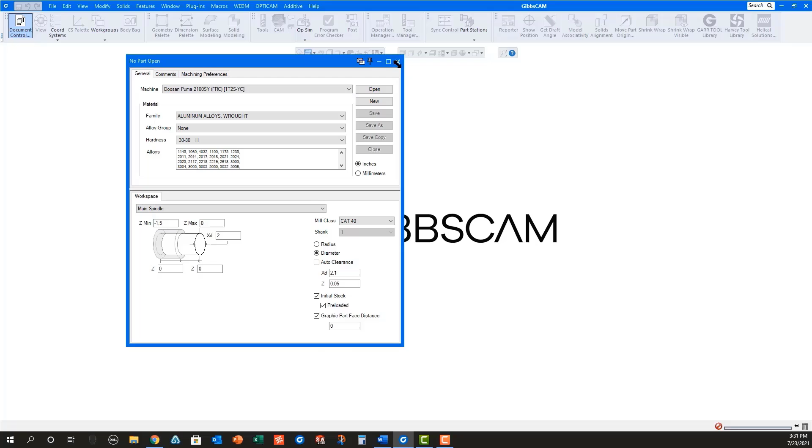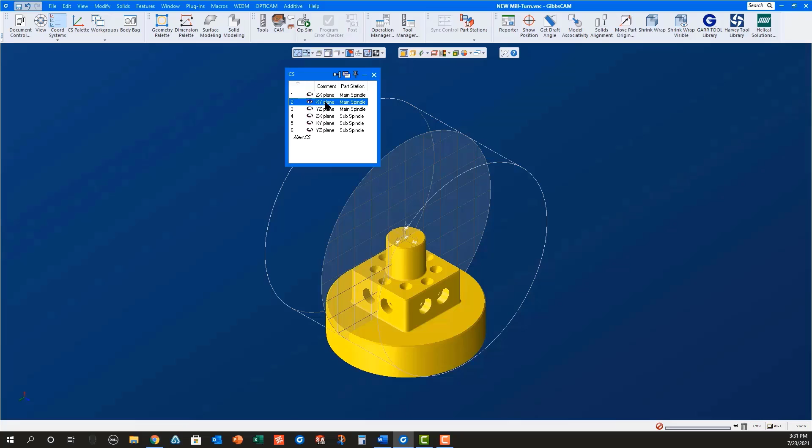In this case, I'm selecting a Doosan twin spindle as my machine before opening a SOLIDWORKS part file named New Millturn. Once the part is open, you will need to position the part properly in the main spindle. I find the easiest way to do this is to open the Coordinate Systems dialog and select XY plane for the main spindle. With Face Select turned on, select the front face of the part before right mouse clicking to align face to CS.

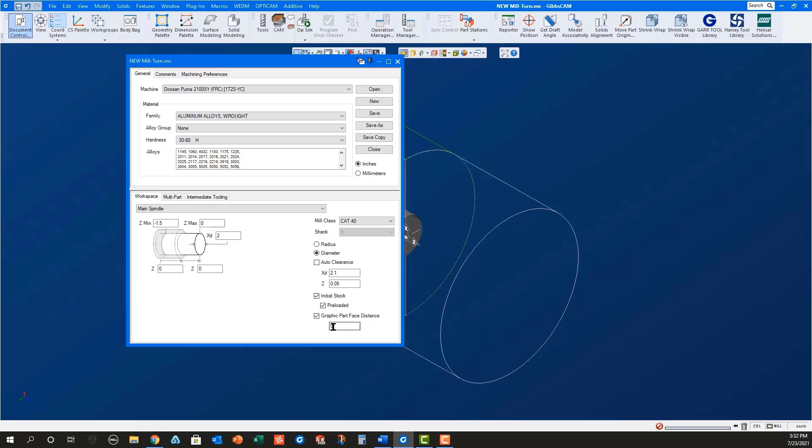Now use Modify Shrink Wrap to set the starting stock dimensions. Open the Document Control dialog and set the desired XD and Z clearance values, and then set the graphic part face distance to 0. Double-click the solid model to place it in the body bag and rename it Part in Main.

Select the part in the body bag and use Ctrl-D to duplicate it. The new solid in the workspace is now selected. Use Modify Translate to move this new solid into position in the sub-spindle. This will always be the length of the part in the Z-axis as a positive value.

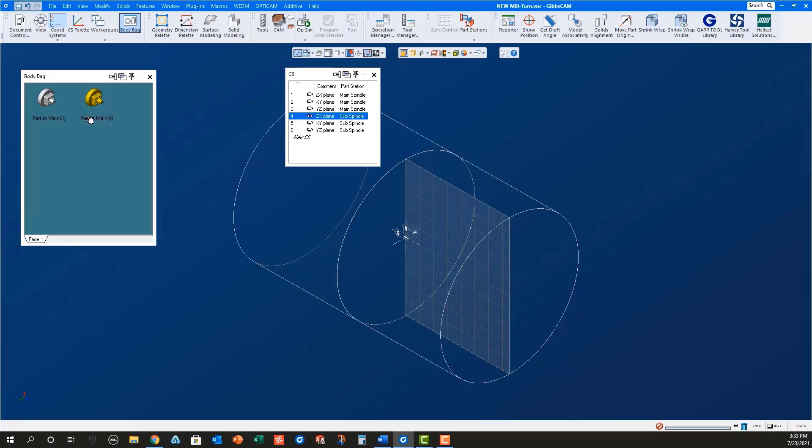Once this new part is in position in the sub-spindle, select the ZX plane in the Coordinate Systems dialog, right mouse click it, and change CS XYZ to make the solid belong to the sub-spindle. Double-click the model to put it in the body bag, where you can rename it to Part in Sub. Now double-click both solids to put them back into the workspace.

Open the Workgroup dialog. Rename Workgroup 1 to Blank since we will leave this unused. Click on New Workgroup and rename it to Check, as we will use this geometry to make certain everything is set up correctly for simulation.

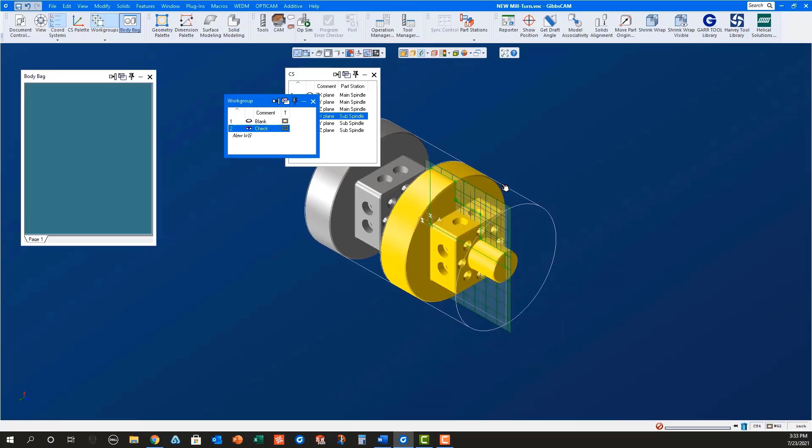With the ZX plane for the sub-spindle still active, turn on the profiler and Slice Spun Body. Select the green profile and then right mouse click on it to extract geometry. Now switch to the ZX plane for the main spindle. Select that green profile and right mouse click on it to extract geometry. Turn off the profiler.

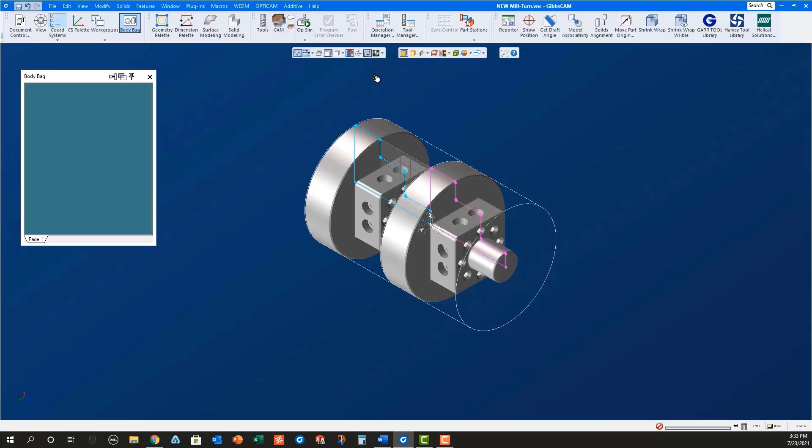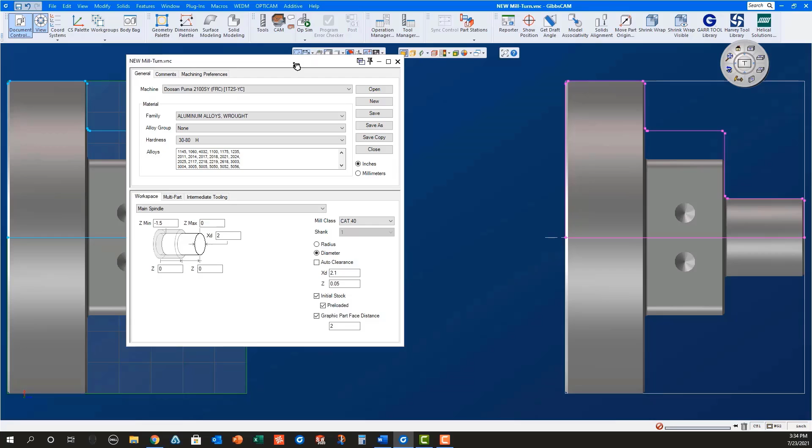Notice the geometry for the main is blue while the geometry for the sub is magenta. This is how GibbsCAM shows geometry in the active CS versus an inactive CS. Open the Document Control dialog and set the graphic part face distance to 2. Notice how the solid model and the geometry for the part in sub move with the stock for the sub-spindle.

While in the Document Control dialog, for the main spindle, set the Z max to 0.025. This will be the stock to remove with facing. Set the Z min to Z minus 1.65, which is the length of the part plus cutoff tool width plus stock amount to face in the sub-spindle.

For the sub-spindle, make sure Initial Stock is unchecked, since the stock is being transferred from the main spindle. Also, for the sub-spindle, set the Z max to 0.025. This will be the stock left by the cutoff tool to remove with facing. Set the Z stickout length to 1.025, holding on to 0.5 of material with the sub-spindle, with the part being 1.5 long plus 0.025 stock for facing with the sub-spindle.

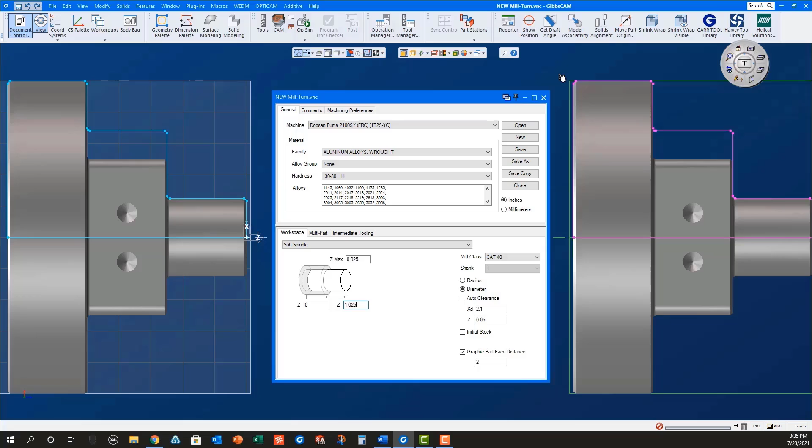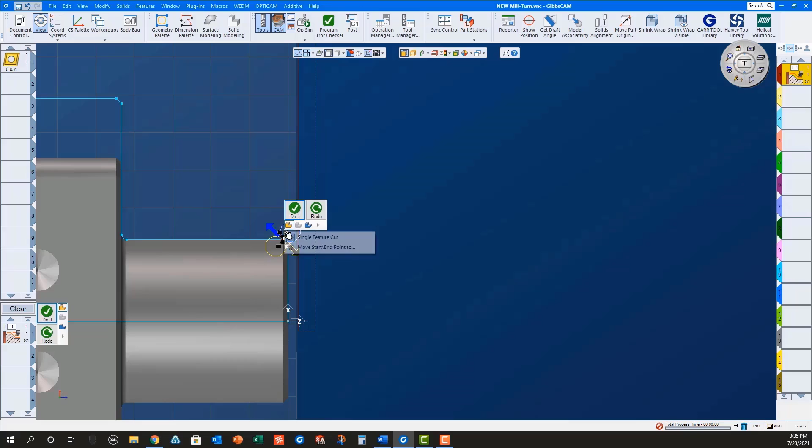Now that everything is set up correctly, we will program the part. First, I will load a facing process for the main spindle. Select the geometry, select the machining markers, and do it. Then I will load a turning process for the main spindle, select the geometry, select the machining markers, and do it.

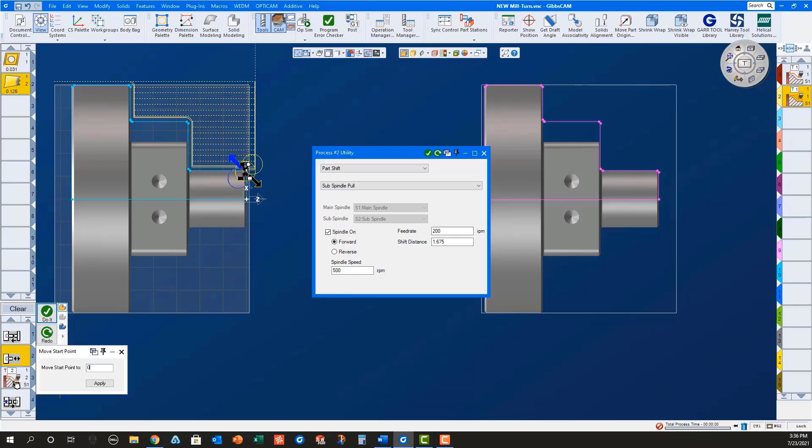Next, I will load all of the processes for picking off the part with the sub-spindle. These consist of a sub-spindle in process to a grip Z of 0.5, a sub-spindle pull with a shift distance of 1.675, which is part length plus cutoff tool width plus 0.025 stock for facing on the sub-spindle plus 0.025 stock for facing the next part, a contour part process with cutoff selected, a sub-spindle return with part in main.

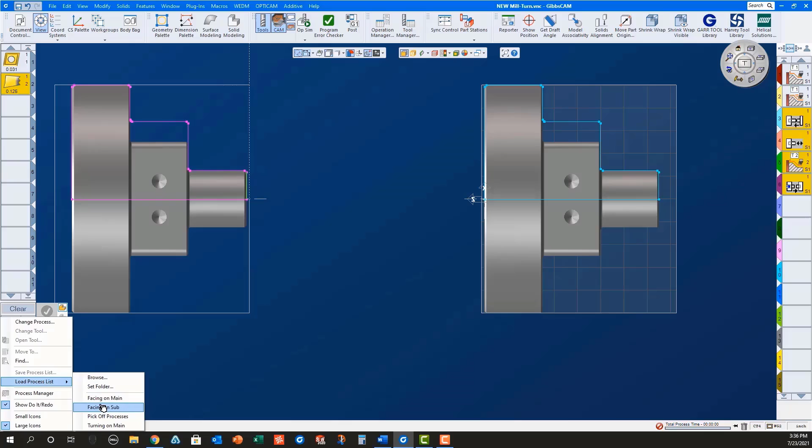I will select the geometry on the front of the part for the cut-off contour operation, and then do it. Finally, I will change the ZX plane for the sub-spindle, load a facing process for the sub-spindle, select the geometry, set the machining markers, and do it.

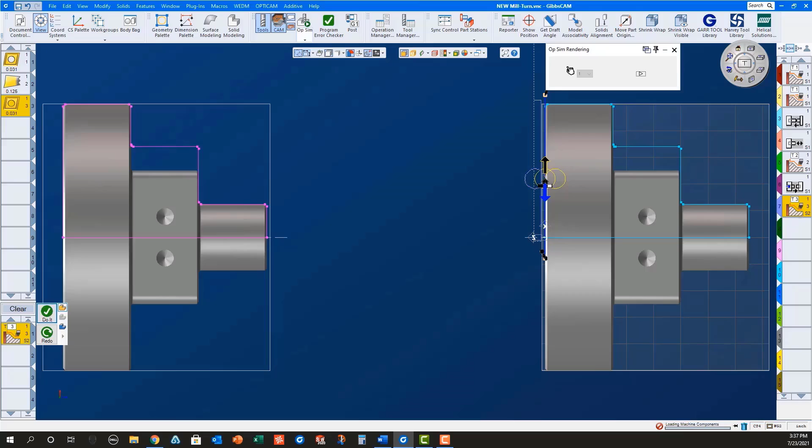Using OpSim rendering with stop at part, load, unload selected, and overlay geometry turned on, I can clearly see that everything is set up correctly for machining in both the main and sub spindles.